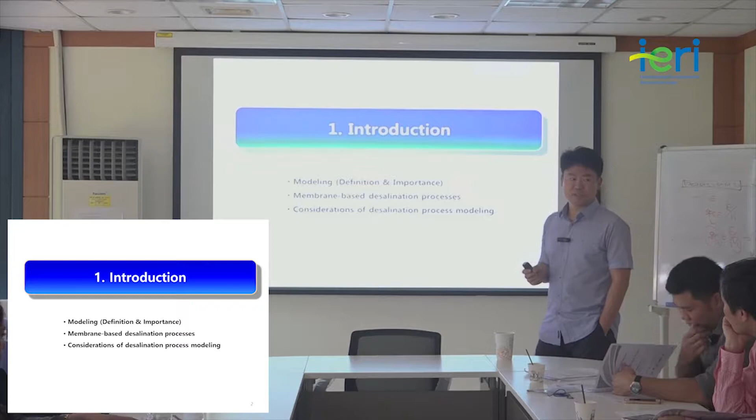I'm going to introduce what modeling is, the definition of modeling in membrane-based processes, and also the consideration of the point of optimizing the processes.

What is model? An example, what is model? Simulation? Huh? Simulation, what is model? Procedure? Yeah, procedure, you guys are so academic. This is model, you know. So then what do you think? Beautiful, right? Handsome, right? And the others, what do you think? Same to you. Same to me. Thank you. You're a very good student. Okay, this is me, right?

So I'm going to give you a quick lecture on what modeling is. Everybody has a modeling scheme in your head. Within 0.3 seconds, you set up the model and compare it with your thinking. We call that the hermeneutic circle. You can find that in your dictionary - it's a very philosophical approach if you can't understand the language. We can say this is the theoretical word: model. This is the target system, which is the real world. So I can say this is the model, this is you - the real world is you, this is the model. Can you understand that? Okay.

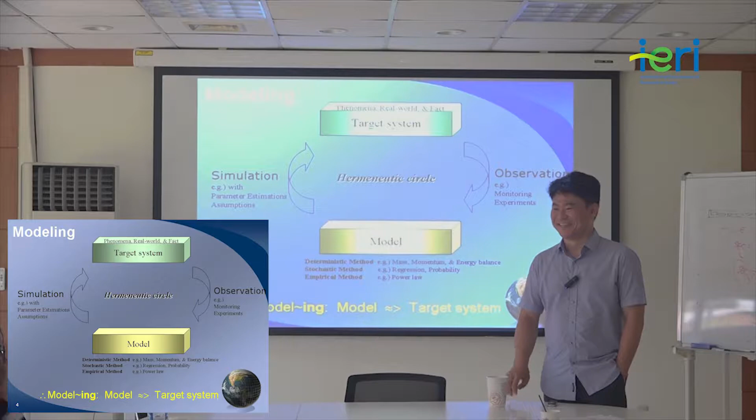Yeah, that's my books. This is the reason I'm here, to sell the books.

That's the statistics part, one of the models, belongs to this stochastic model, and that's my book. If you're interested, I can buy that for you. No, I may give you one—I don't know how many textbooks I have, but I can give you one with my signature. Maybe I have two now, I'll check it.

So modeling starts from this model and target system comparison. That's modeling, an ongoing process. So why do we call it sampling? You can see the back side of this textbook, the back cover. There is another language there, sampling, right? Why do we call it 'ing', that ongoing format?

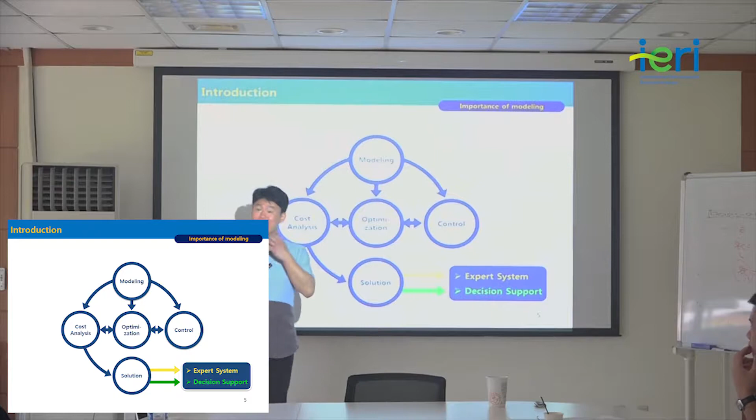Let's say we collect that temperature here. Where is this temperature location? Where? Tell me. Where should that temperature location be? Here? Here? Here? Yeah, that's the reason we need sampling.

We have to do random sampling to get an objective result, right? That is science. Statistics is a grammar of science, and modeling is a grammar of engineering. So statistics is grammar of science, modeling is grammar of engineering.

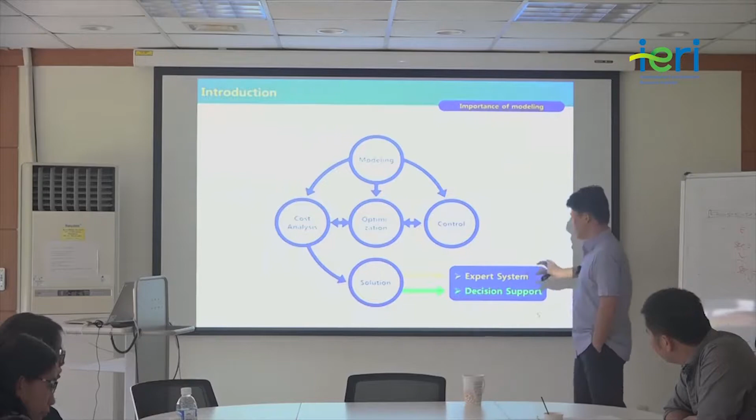So starting with this modeling, we can do control approach, how to do optimization, how to save money with cost analysis, and what is the solution for expert system or decision-making system. First one is modeling.

Today I can give you this example of CFD. Anybody know that? CFD—civil, chemical... CFD, computational fluid dynamics, CFD, computational fluid dynamics, and image and numerical analysis. I will give you the example, the process model, and how to control it.

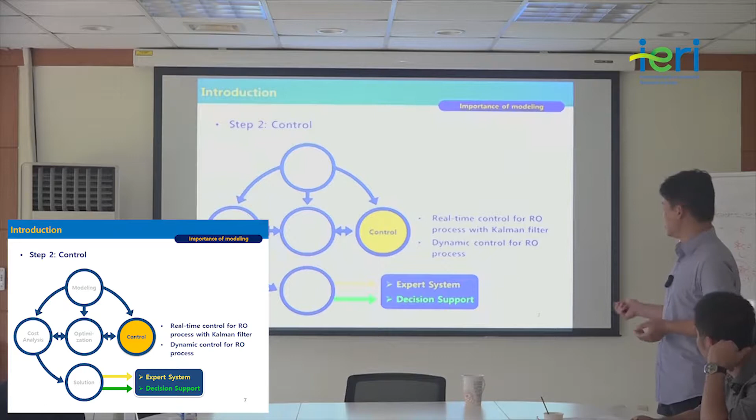So we will learn about control, real-time control with Kalman filter. Kalman filter is one of the engineering tools to remove unnecessary signals. Then dynamic control for reverse osmosis, cost analysis and optimization that might happen using artificial neural network, AI, artificial intelligence approach. And the last one, after controlling, modeling, optimization, we should say something as a decision maker.

So the decision maker needs this expert system and decision support system. So this is desalination system design and model development, pilot system, data collection, model integration with validation and verification style, and the expert system can support your decision making.

Reverse osmosis you have learned, right? You have seen this one—intake, pre-treatment, reverse osmosis main process, and post-treatment. Usually we have two passes: first pass removes almost 97% of the salt, and second pass removes 99.9% of salt. Then storage—we have to do remineralization for drinking water, and this whole process needs some acid, chlorine, anti-scalant, sodium bisulfite, and other chemical cleaning procedures for removing pollutants.

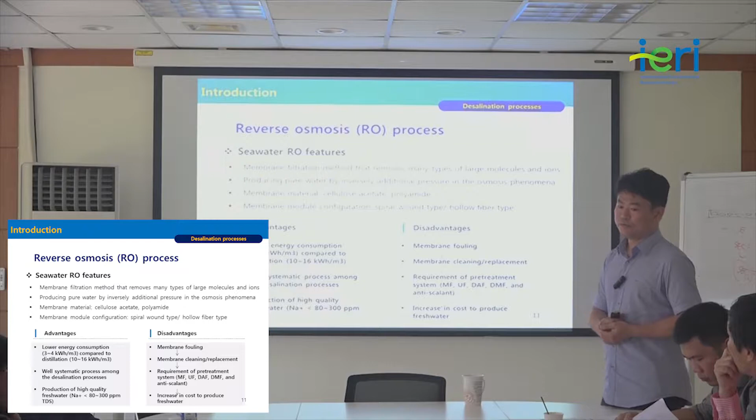That is a typical reverse osmosis system. We have advantages and disadvantages. Advantage is very low energy consumption compared to distillation, that boiling system—it takes almost 10 kilowatt hours per cubic meter, but reverse osmosis is 3 to 4 kilowatt hours per cubic meter of water. And the high quality of fresh water—one of the indexes is the sodium removal ratio under 100 ppm.

Disadvantage, as you know well, there's fouling. The membrane cleaning and replacement needs some cost. And the pre-treatment needs almost a similar system to drinking water systems—MF, UF, DMF, DAF, all membrane systems. And anti-scalant chemical we have to add to remove that scale, and eventually it increases cost.

So seawater reverse osmosis is a membrane filtration, and the types of membranes might be polyamide, PA membrane recently, and membrane module configuration is usually spiral wound type. Have you ever seen one? Yes, downstairs, right? But you did not understand.

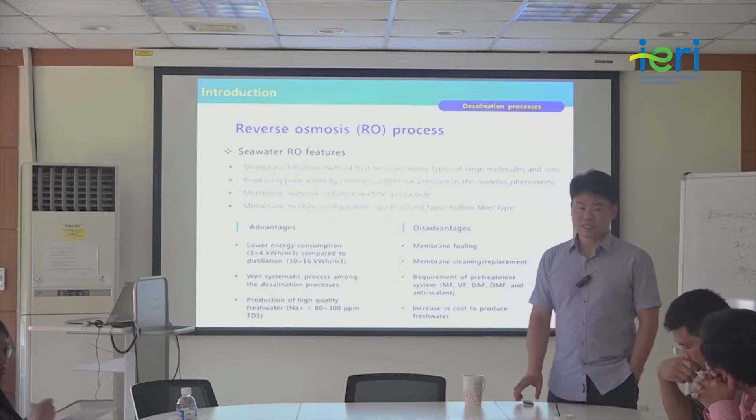Any other questions so far? So, I think I will show you that. See, this is the introduction. From now on, it contains a lot of equations. It starts.

So, reverse osmosis. Reverse osmosis needs high pressure pump, right? Yeah, to squeeze out the salt to make it drinking water. But forward osmosis has the opposite direction. It uses naturally driven pressure. We call that osmotic pressure. Osmotic pressure - do you know that?

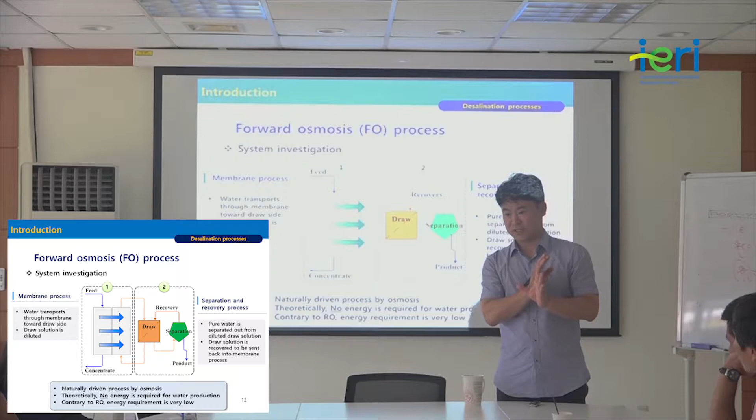This pack is separated by a membrane. This pack contains a high concentration of sugar, and this side is empty. So whenever you go to any river, any dirty water, you can put it into this side. Dirty water is okay, any polluted water is okay. Sometimes if you are in an emergency situation, you can use your urine here. You can use your urine here. Yeah.

Temperature is a little bit warm, right? A little bit, but it's drinkable. So this membrane starts to separate the water, only water, to the sugar side. Then you can drink the sugar water. That is a military army use for forward osmosis system.

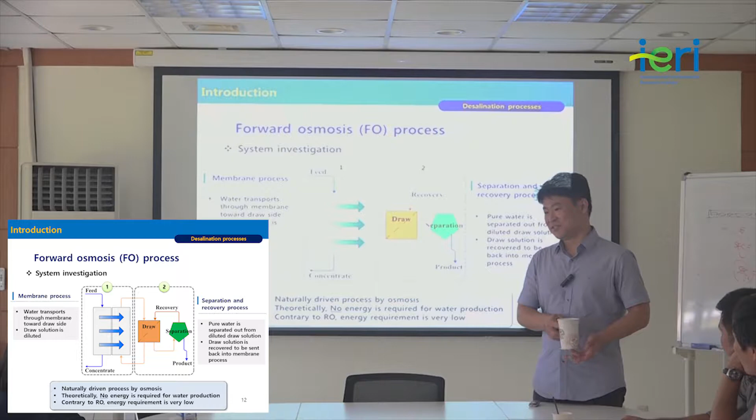There's no energy needed. If you are very urgent, you can press this envelope. So that's forward osmosis commercialized use. So I try to use my urine. The disadvantage is temperature - I like ice water, ice coffee, but urine temperature coffee is my body temperature, so I have to drink that a little bit warm water. That's sugar water, not urine.

100% rejected, but this draw is on the sugar side. The pure water is separated out of this diluted draw solution. Draw solution is recovered and sent back to the membrane process here, so we can utilize that. The draw solution is not only for salt, no - it's also used for other things. Usually we use that...

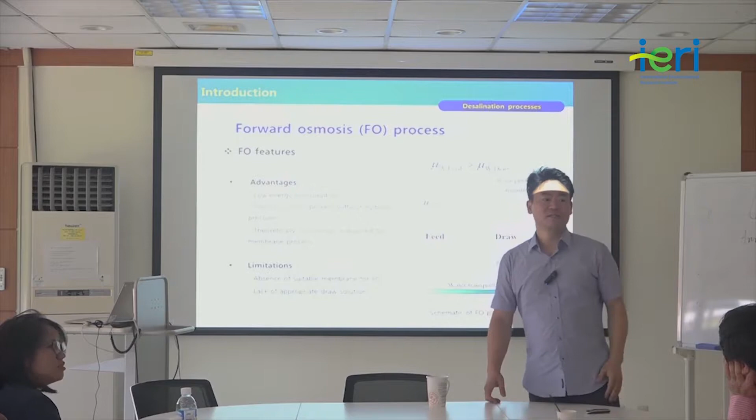Where did you get that coffee? That one? How many days do you have left? No, for this training - this is the last day. Wow, then I can tell you there's another coffee machine there. You can use it. Did you use it? No. Why not? Oh, I didn't. He is my TA, and he is my research professor for this lab. He's my TA - explain this structure to them.

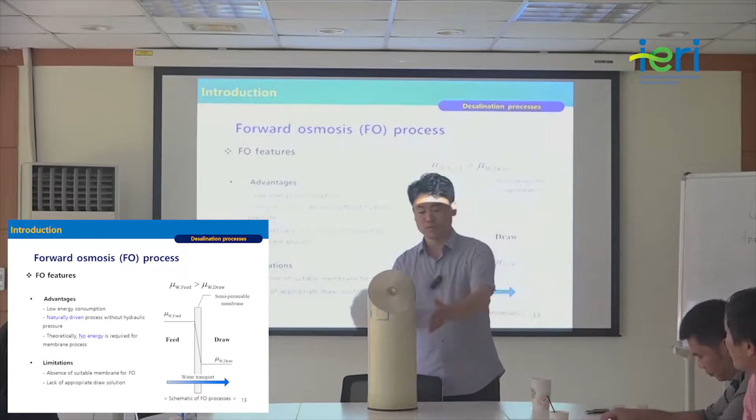You have learned, right? Do you know this? Yes? Come here, explain it. You said yes. Okay.

Reverse osmosis, water from here, right? Here, but you can see there's some layer here. Has somebody already explained this to you? This is seawater - let me show you the picture, but not really. Okay, seawater goes to here, and in between there is some layer, some chasm here that we can push the water through. Then that goes to that empty layer, accepting the water inside, and then why is this a roll? For bigger surface area.

Yeah, for bigger surface area, right? But how do you squeeze out the water? Pressure - with the pressure, yeah, high pressure. Then water rotates inside, like your toilet paper - push on this side, and then roll in, and there is some hole here, right? Hole here squeezes out all the water into here. And the hydrodynamic flow inside of this membrane rolls in here, or the surface rolls in here, water tries to follow this waterway, this road, and then eventually this hole collects the fresh water.

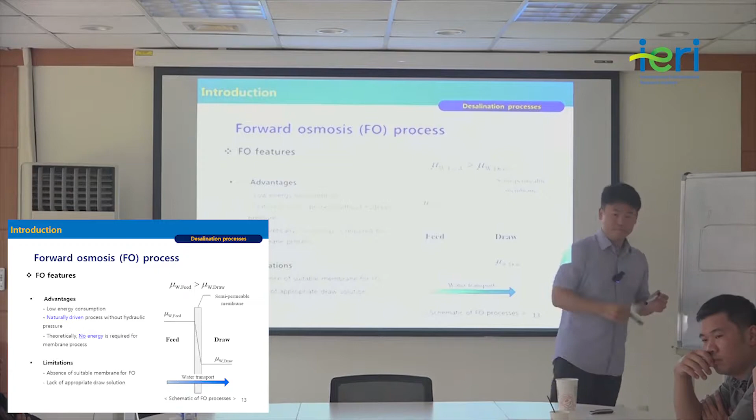This membrane has these two holes, two leaves. Starting with this format here, and then roll it - that's the way, roll it. Then it has a two-way direction, right? One leaf is here, the other leaf is here. You can see them, and we have two membranes here.

Here, that is the waterway, this space, inside this space. So if you unfold it, toss that one - if you unfold them, it looks like that. Unfold that, it looks like this. And where is the direction of seawater? Here.

Right? That's rolled, right? But if it had unfolded, it looks like this two-leaf system. There's a four-leaf also, it depends on the company - four-leaf. So two-leaf, four-leaf, and roll it. You can understand, right? Then this way, this is rolled.

This is seawater, and this is the membrane, right? And inside this space is a hole. This space is a waterway. So this seawater is squeezed under high pressure, and then by following this waterway and this hole, it accepts that fresh water, that hole. Can you understand that? Graphically, you have to understand that is the reverse osmosis membrane.

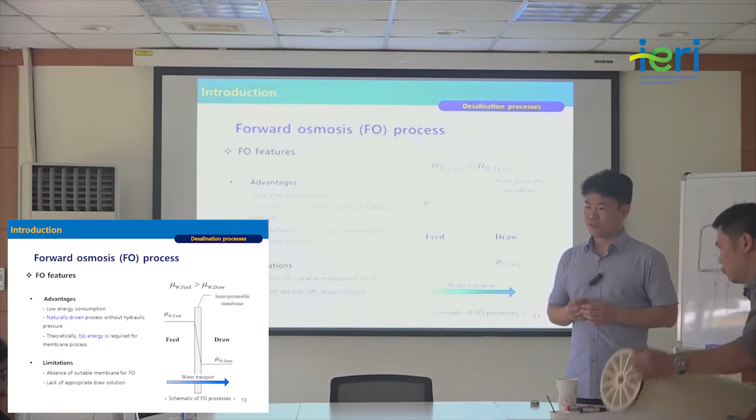Goes in - this is a drinking water system. But for forward osmosis, we don't need high pressure. We don't need high pressure. Yeah, you can put it on here.

And also, if you see, you can - did you see the spacer here? Spacer inside, did you see it? I see in the other one. Yeah, here, you can feel it - this is a spacer, here. That.

Why do we need a spacer? Why do we need a spacer? Space for the water, space for the water. Nope, here. So, top one - for filtration? This one, no. Otherwise it will stick. Why do we need a spacer?

Okay, I hope that you can enjoy this one. It's a simple design - all the ideas start from here. And how to roll it, that's the technique. It's a very simple design, right, that one - it's a very simple design.

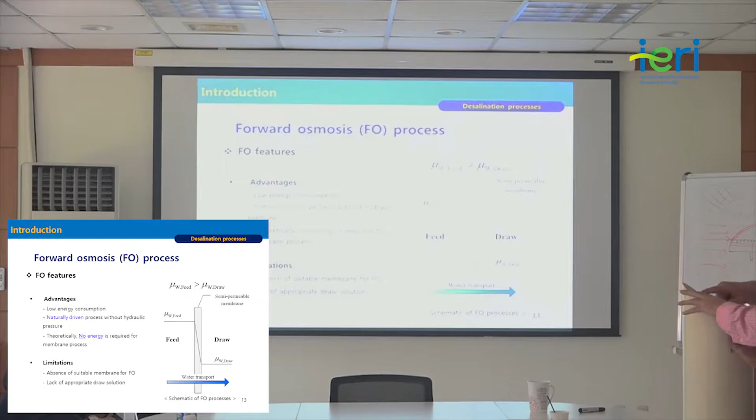So if you put that spacer here, you can feel it inside. Some spacers look like that - try to find it. No, be brave, it's okay, it's already broken, be brave. You can feel it, right? And this is a spacer here.

The reason is this spacer's role is - let's say water goes in that way, see here, water goes in that way. This is a spacer, right? This is a spacer. Water goes in that way, then see, this concentration polarization is broken. How do you do that? The spacer breaks it - meet this spacer, broken. Meet this spacer, broken. So this concentration polarization was broken down that way.

So this layer - originally if we don't have any spacer in between, this concentration polarization boundary layer thickness hinders water penetration. But if you have that spacer, it breaks this boundary layer, meets, breaks it again. That is the theoretical approach for how water can penetrate this thin layer. To roll this thin layer, we need that spacer - not only for reverse osmosis, but also for forward osmosis, pressure retarded osmosis, and membrane distillation, to make it a spiral wound type. You should consider this concentration polarization.

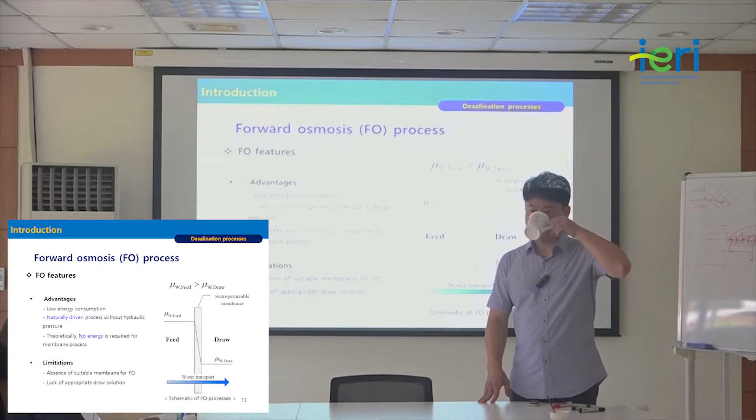So osmosis needs solvent and solute. And also, osmosis phenomena is based on potential theory - chemical potential.

So when you have a coffee with water, let's prepare to separate it. Let's do that. Why not? I'm sorry, I touched yours.

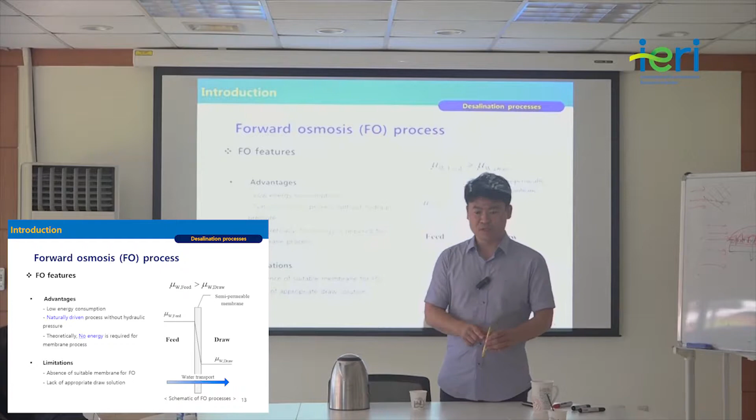So let's say this is water here, and water here. We call that chemical potential - water chemical potential, coffee chemical potential. Which one has high potential for water chemical potential? Water, because it's water chemical potential. Which one is high chemical potential for coffee? This one, coffee, right? But if we mix it, this is high concentration, right? This is low concentration, right? But which one is high water chemical potential? This is high water chemical potential, low water chemical potential, because we don't have water here, right?

That means energy should flow from high to low, right? High to low. Which water chemical potential is high? Water. This is low water chemical potential. So it moves. When can they stop? At equilibrium. We call it equilibrium of what? Equilibrium of water chemical potential, right? Then it stops. That is osmosis.

Water chemical potential draws to low water chemical potential, right? Coffee, water - then why? Let's say, can this be mixed in this state? No. When can they mix? If I push that, put it into here, right? But without my action, they cannot mix, cannot be mixed. That's the reason we call that...

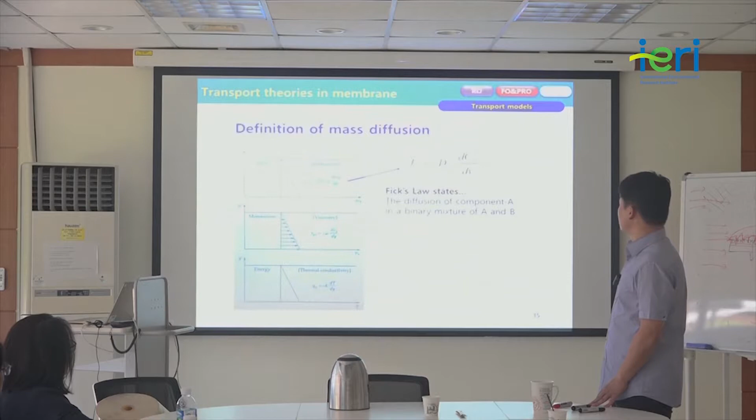Potential. Potential is not energy. This is like a kinetic potential, and position is high - locational high potential, right? We call that potential energy. If I drop it, then it becomes energy, which can transfer to the ground. Before it meets the ground, this is potential. Same idea - without mixing, they have potential.

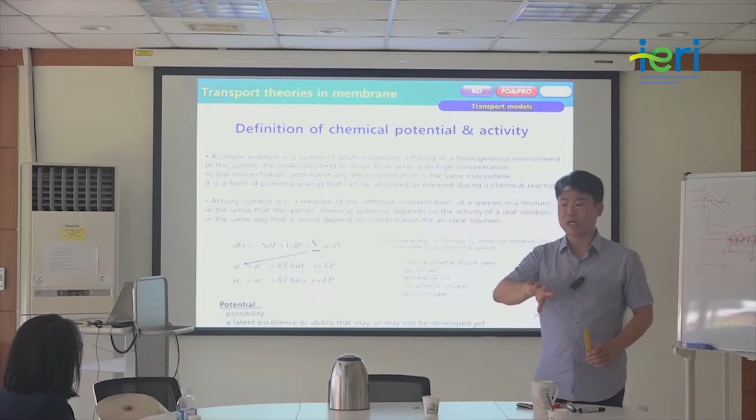Potential. But how can they mix? Then with my action, this can be mixed, right? Why can they be mixed? In this state, this potential switches to energy. We call that mixing energy. In this state, we call that mixing energy, but before mixing, we call that potential.

That's the reason we call this forward osmosis - mu is the chemical potential of water. Feed has higher chemical potential of water, draw has lower chemical potential of water, right? So high energy is supposed to move to low energy. Between them, we call that a semi-permeable membrane - semi-permeable means selectivity for water. Then this high chemical potential water energy is moved. That is natural energy.

Like this mixing - this mixing energy is also natural energy. So it's a naturally driven process without any hydraulic pressure. This is a gift for you. This rotational energy is additional mechanical energy, this is not potential - this is actual energy combining chemical potential and mechanical energy. So you have to pay me then. So this is no energy we need.

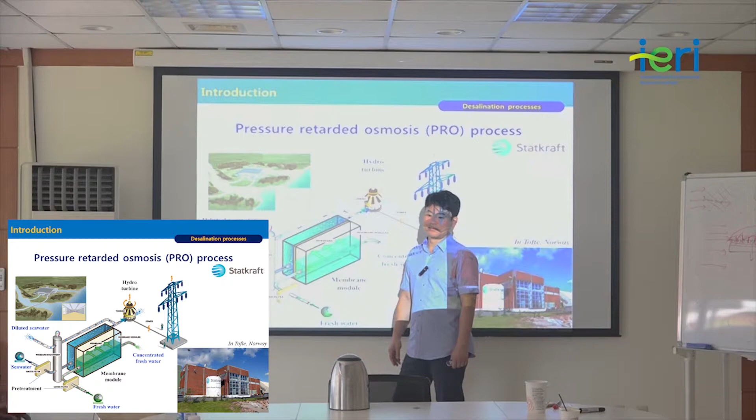Fresh water, you can say coffee - this is just water, fresh water is just fresh water. This is a salty water, you can say there's some coffee, concentrated. So water chemical potential is fresh water is high.

That's obvious. So river water, any area like an outlet between ocean side and river side, we call it confluence of river and ocean. Coastal area, many countries, most countries have this confluence. This confluence site, you can put this generating plant. This is just an imaginary view, but now it's working in Norway, Korea.

Vancouver, Canada, we try to construct this generation plant, PRO, pressure retarded osmosis plant. Fresh water goes there, here is a membrane, a big membrane. It looks like this, but this is a conceptual viewpoint. Water, this high water chemical potential, is supposed to move there, right? Seawater - this membrane makes that forward osmosis kinematics here.

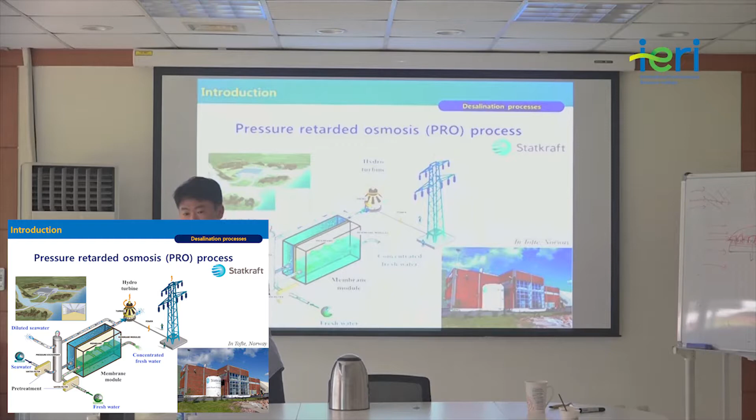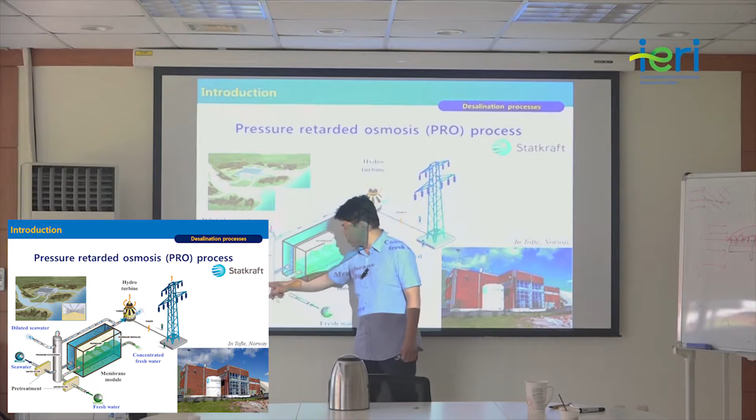Now it's commercialized, this pressure exchanger. The first purpose is to extract or induce the water, to import the water into this side. We need a pump here, right? Also to introduce this seawater into this container, we need a pump here, right? So this pump energy can be recovered by the pressure exchanger - some part of water goes there, then rotates the turbine blade.

Then the other water goes there, and inside here pressure is exchanged. So the pressure exchanger eventually means no energy is needed. We need the initial introducing pumping energy. And after one turn or ten turns of this system, the pressure exchanger starts to work, then we don't need another energy to run it.

This is pressure retarded osmosis, and my lab must be the top leading research group of pressure retarded osmosis in the world. So most of the research related to PRO is my students, and my group is the best research group in the world. And also I introduced this into Korea. Korean government started 5 years ago - we started an almost $30 million project to develop a small scale pressure retarded osmosis. Now it's working.

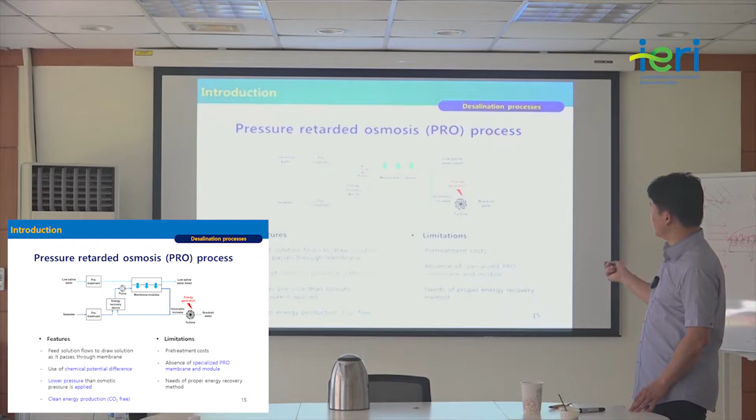This is pressure retarded osmosis - see here, low saline water, seawater, energy recovery device. So this needs some pumping energy, initially input this energy into the membrane. This is pumping energy here, because we need seawater. Introduce this high saline water, and the membrane drives this naturally - this is the forward osmosis process, and then this goes to volumetric increase. This volume increase rotates this turbine, and then produces brackish water.

It has 3 advantages, so that's the reason I put my effort into this PRO research. First one is, if you use reverse osmosis, what is the problem? Brine.

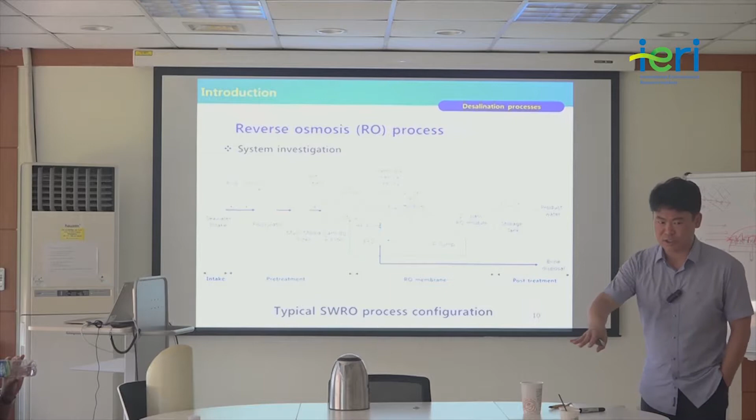Brine, concentrated. See, seawater can be made drinkable, but the other part becomes concentrated. That is another wastewater, because it's double the salt concentration - because we removed it for drinking water, then the other part might be concentrated, right? That is wastewater, that should be treated - there is another treatment we need. Also, we discharge that into the sea - another pollution, right? For the reverse osmosis disadvantage, we need this separation technique.

For pressure retarded osmosis, first, seawater can be used, and river water can be used. River and seawater generate energy when they meet together as brackish water. Seawater can be reduced down using this, and we will learn with the reverse osmosis system. So this low saline, brackish water has no environmental impact.

But reverse osmosis has an environmental impact: brine, concentrated water. So that has 3 big advantages, which we will touch on after combining all the processes. Clean energy, CO2 free. That means we can suggest this for the Paris climate agreement. This is free energy, new renewable energy.

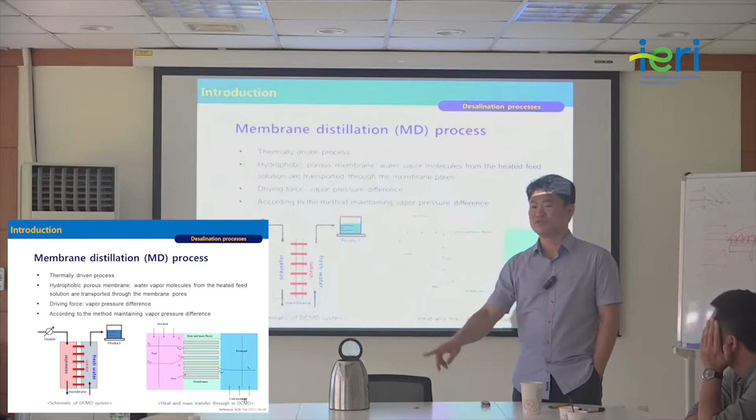You need a condition: 1 bar, 25 Celsius room temperature. Then water is supposed to boil at 100 Celsius, right? Without that condition, water sometimes can boil around 90 Celsius. Sometimes it can boil around 100.5 Celsius. Who said 100? It's funny science, right?

So you have to learn exactly the same thing here. Membrane distillation uses that scientific phenomenon - vapor pressure can be generated anytime. When delta T is greater than 30, or 25, it's okay, depending on the condition - 25 or 30, sometimes 20 - then water vapor is generated. So just think, when you're boiling ramen or any kind of soup, you imagine that 100 Celsius makes the water vapor, right? No, it's not. Water vapor can be generated anytime delta T is greater than 30 or 25.

Temperature difference, temperature difference. So with this hot feed, cold feed, if we have a temperature difference around 25 or 30, then water vapor is moving through this pore, this hole. That's the mechanism of membrane distillation. So membrane distillation needs a hot feed and cold feed, and the water is moving.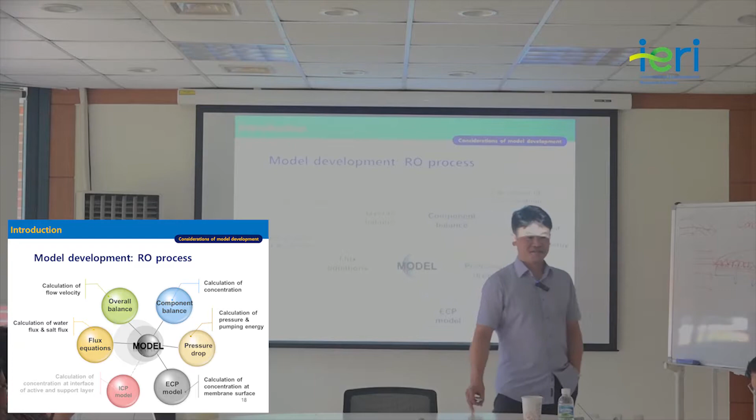How's your lunch? Yeah, good, nice food. But every day you're a liar. It's just student union lunch, right? That's just for the students. Oh yeah, you're a student. Then it's delicious, right?

So actually, to check up all the processes in reverse osmosis, forward osmosis, and membrane distillation, we have to check up overall balance, mass balance, energy balance, momentum balance, component balance, and also pressure drop, flux equation, and ICP. Have you ever heard of ICP?

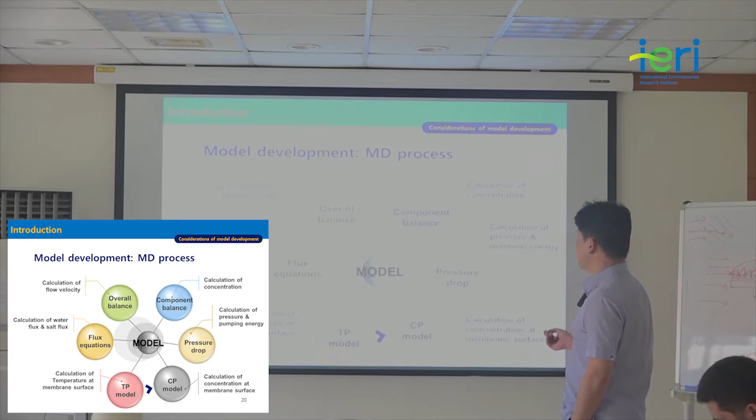Internal concentration polarization. ECP is external concentration polarization. But I don't want you to remember this, it's tough. I'll explain a little bit about that. These are the modeling steps for all phenomena inside of a membrane. This is a general description of membrane and transport model.

When we have this membrane, active membrane here, let's say this is feed in, feed out. When we have this concentration in the bulk side, this bulk concentration can be same as inside of membrane. Question: this bulk concentration, theoretically, should be same as this one, right? But there's some divide here. Why is that?

Obviously this is disconnected, right? When you see Dr. Amir's animation, he generates molecular dynamics with continuity of these two. There's no barrier there, so he considers everything as a continuous system. You saw that at the molecular level. But for most membranes, you cannot detect inside the membrane. You can detect here, right? Put a sensor in the bulk side here, and put a sensor in the bulk side here. The feed side and permeate side, we can monitor the CF and CP.

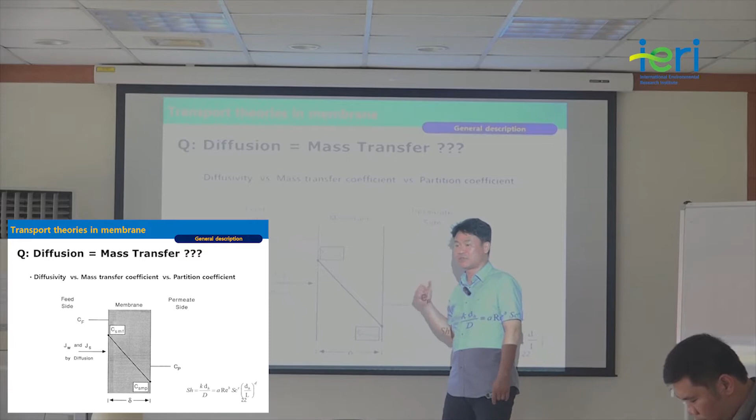Simply, I can say that this is diffusion, and this minus this is mass transfer. Bulk side monitoring results in mass transfer, but inside the membrane, the transport phenomenon is diffusion. For example, we have Fick's law: JA is mass flux, equal to DAB, dC/dy. This is Fick's law - high concentration is supposed to move to low concentration, right? That is Fick's law here.

But sometimes this flux can be calculated as A times delta C, something like that - CF, CP, right? Something like delta C, feed minus permeate concentration, something like that. Here's A or B, right? But are they the same?

What is this? Concentration and permeate concentration - that's measurable, measurable, right? A is a sum coefficient, just a coefficient. Then what can we utilize? Monitoring data - CF, CP, right? But this is not actually the same, this is a theoretically correct expression, depending on the distance and change of concentration. This is diffusion coefficient, diffusivity. We call this mass transfer coefficient.

In this case, we consider distance. In this case, we don't consider distance. But this is a measurable quantity - no, inside here, diffusion is a theory. Diffusivity is this one, DAB. Mass transfer is a measurable quantity. This is disconnectivity, diffusion is continuity - totally different situation. Diffusion has continuity, but mass transfer has disconnectivity here. So that's the reason we can utilize CF, CP.

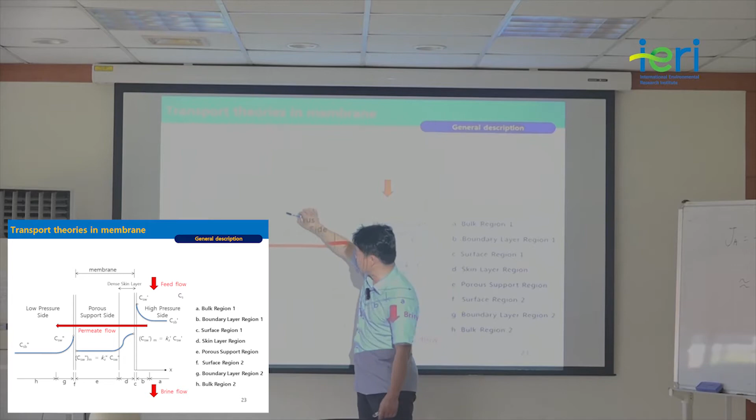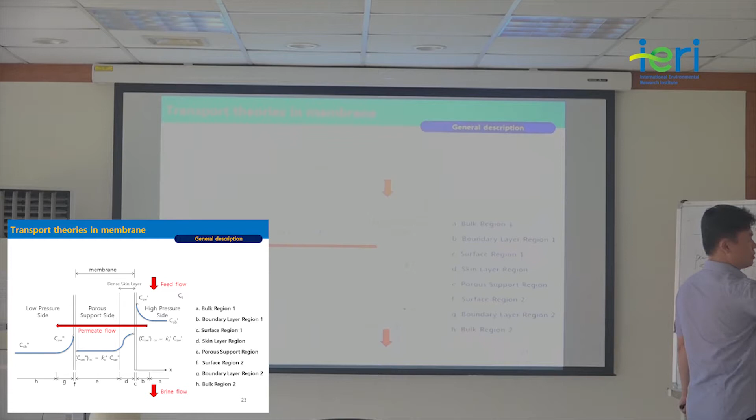Symmetric membrane - but what happened here? Skin layer here, skin layer here, then symmetric. Like this, skin layer here, then if you go there and drop, and a little bit drop, something like that. If you go here in this way, but drop, drop, something like that - we call that asymmetric membrane. This is the flow direction depends on this skin layer, support layer. This is a symmetric membrane.

Membrane is here, skin layer. But if you change it, that flow direction from here to there, a totally different phenomena happens, right? Active layer actually is supposed to reduce 99% of salt, right? But porous media, after that, just flow channel, this is. But once you change the direction, cannot be the same as this one. So active layer makes the membrane asymmetric. This asymmetricity makes this different phenomena of the fluid.

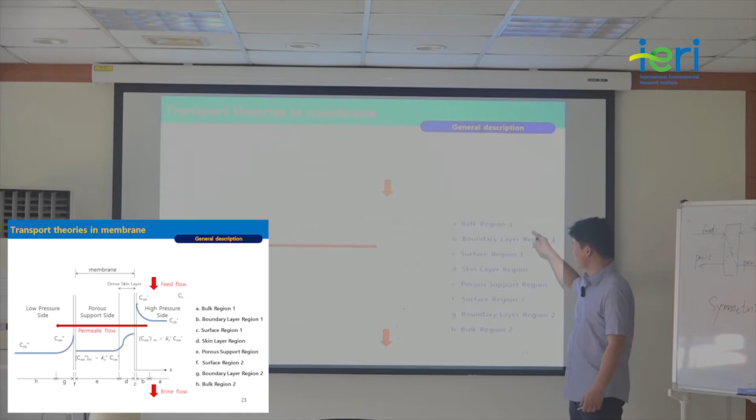We call that A is bulk region, H is bulk region also. See there, H, A here is a bulk region - that means there's no effect on membrane, just flow area, bulk. Boundary layer region 1, B, boundary layer region 2, G - they are similar here. Surface region 1, skin layer region, porous support region, surface region 2. So let me move on to there. Bulk region here, no concentration gradient. What's the gradient? The difference.

You know, art and science are similar. It's artistic language, right? It's art language. This is gradation, right? Dark to lights, right? Dark to lights, dark to lights, right?

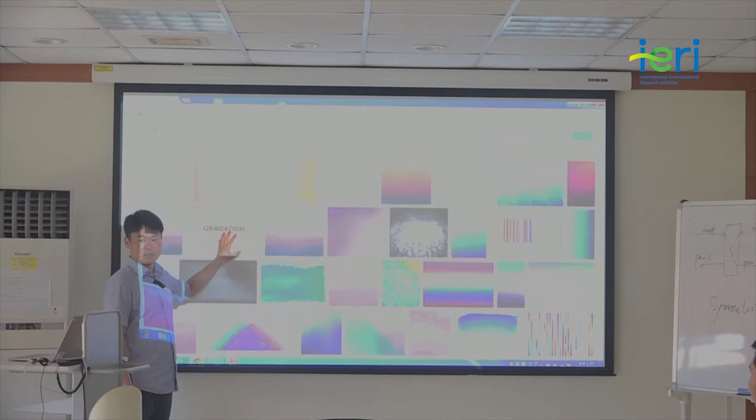Gradation - what's the gradient then? Gradation, you know gradation, right? It's art language, changing that color from dark to lights - that's gradation. What's diffusion? What's gradient?

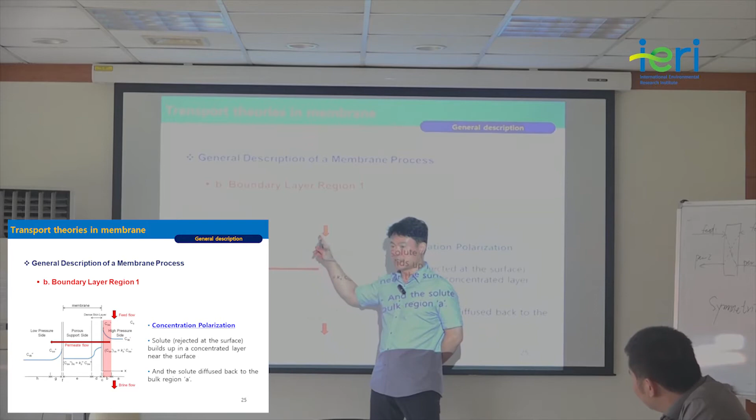Second one, concentration change, right? Concentration is changing, then there is a gradient, right? Here there's no gradient, right? Here there's a gradient here. So when seawater is squeezed to this membrane with high pressure, in common sense, concentration is increasing. It's common sense, so this increased concentration is supposed to move through there.

So within this region, concentration is squeezed, and polarization, we call that concentration polarization. Polarization means a squeezed polarization, concentration polarization. And then here, this region, membrane, this region, diffusion happens. Something like that.

What is this? Okay, good student, gradient, gradient. This is gradient, change of concentration with respect to change of distance. Gradient. Here, diffusion coefficient, diffusivity, we call it diffusivity. So within here, diffusion starts.

And then here, salt is rejected based on this here and there. This is rejecting concentration of this. Skin layer is the active layer here. And then support layer, most of that.

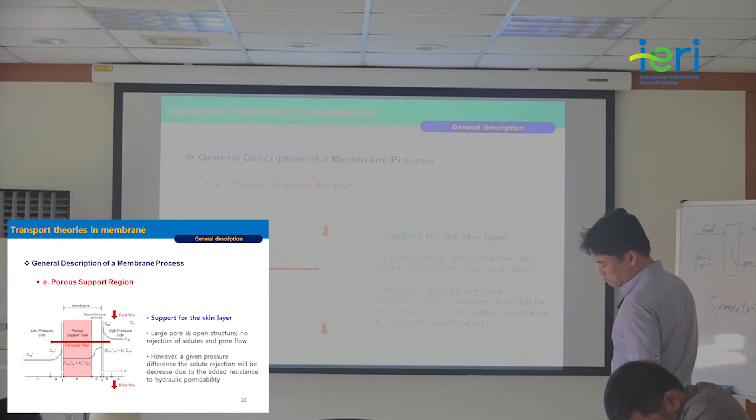Let's say I gave you this coffee, right? Where's my money then? When we start this coffee with water, this is pure water, this is coffee. When you start, just put this on and wait here, just wait here, diffusion happens, right?

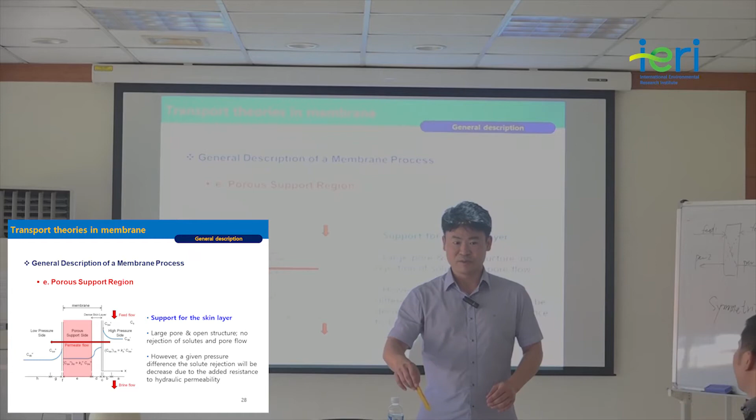But if I stir this using this, then mixing, we call it convection. Convection happens. Is it that winds, fan, convection or diffusion? It's convection, just a forced convection. Forced.

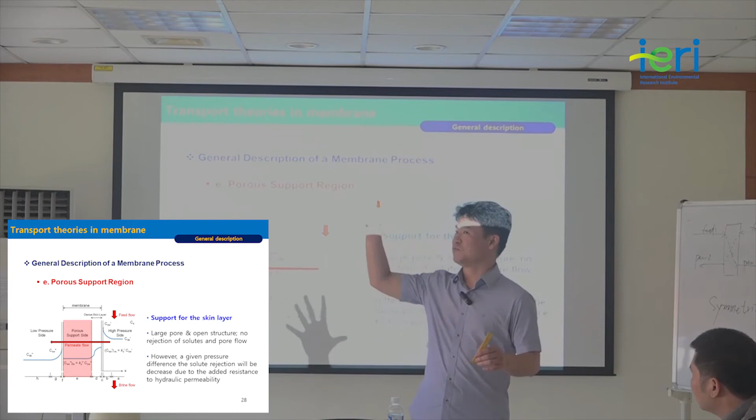Artificial convection, that one. Without that winds, fan winds, some temperature or air is moving, that is? No, that's natural convection. That's natural convection. That one is forced convection. Different. Whatever that is, something is moving here, that is convection with velocity. With velocity, then velocity related to, do we have a velocity here? There's no velocity, right? There's no velocity.

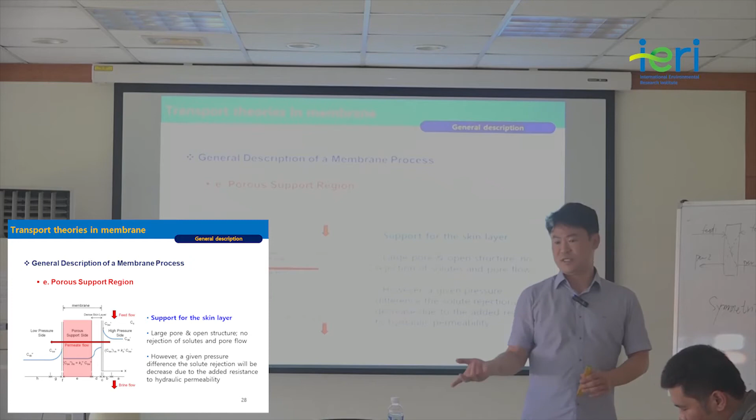Only concentration change with respect to distance, only that one. When some phenomena happens in distance and gradient, then diffusion. But when something moves with velocity, we call it convection. So we have natural convection and forced convection here.

Okay, then support layer, most of the convection happens, not diffusion. That's the reason here, very flat. Very flat here. After that, there's another discontinuity here. This is a skin layer, this is a support layer discontinuity here.

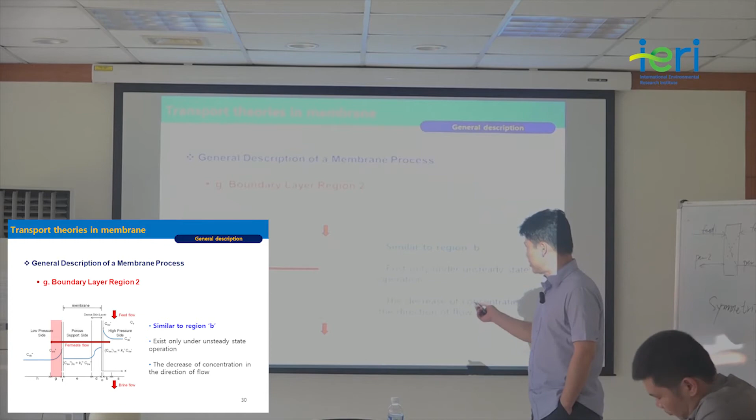Then concentration is supposed to be a little bit high. Then this is another desorption part of this membrane. And this is similar to B here, a little bit here. Not, even though not squeezed close to the membrane, there's some concentration increase. Close the surface, some concentration increased. Similar to no concentration gradient. This is the membrane phenomena.

You can graduate today. Yeah, that's it, that's it.

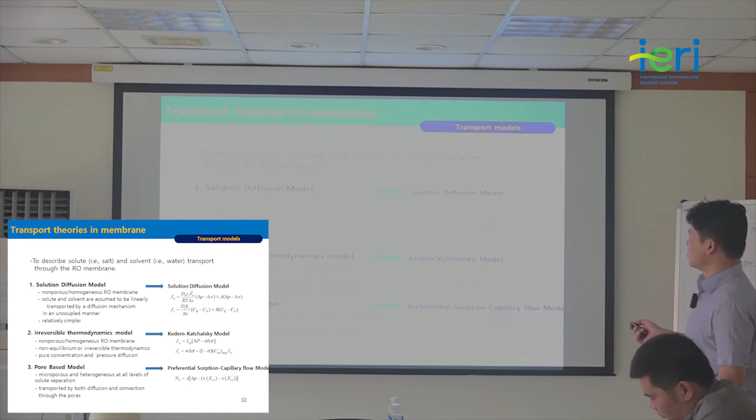Simple, right? But there's a lot of models: solution diffusion model, irreversible thermodynamic model, pore-based model, and here diffusion-based model, pore-based model, Kedem-Katchalsky, Spiegler-Kedem, surface force flow. You want to learn? Then you have to enter this school first.

Okay, but you can study. If you have a question, then send me an email, or send your staff or student to me, or you can visit me. Okay, as you know well, this school is very famous in water. Number 1 in Korea, and number 7 in the world. Number 3 in Asia.

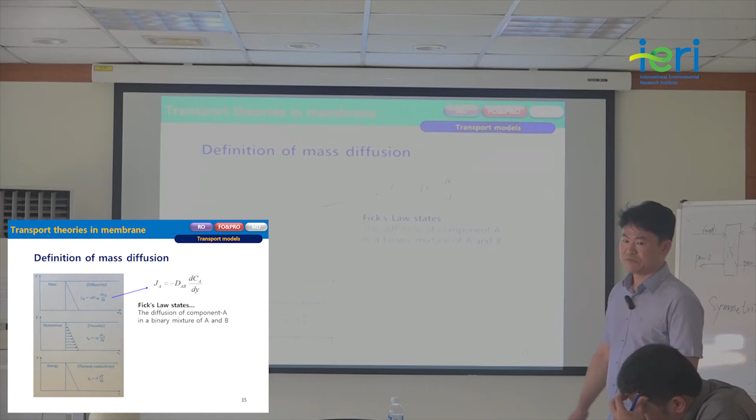So this is Fick's law, states the diffusion of component A. This is viscosity, this is Newton's law. This is thermal conductivity, Fourier's law. So these three - mass, momentum, energy transfers - are the same phenomena, we call transport phenomena. I will skip that. If somebody asks you, then give this note to them. Study it, there's the answer.

What I can say here, this is the procedure why concentration switched. Actually this is a concentration play, right? High concentration, low concentration, but it abruptly switched to pressure here. This is a flux, water flux. Applied pressure, osmotic pressure, this minus this. Why? We were talking about concentration, but it switched to the applied pressure and osmotic pressure.

This is the procedure how to switch, using thermodynamics, Henry's law, chemical potential, mass balance, water flux. That's it. So these are the thermodynamic parameters.

Theoretically, should we measure? Or are these two parameters measured? Applied pressure I give, right? 60 bar. Osmotic pressure we can find. Seawater is around 30 bar, 25 to 30 bar. This is measurable. Flux, water flux, we measure. This can be compared with these two.

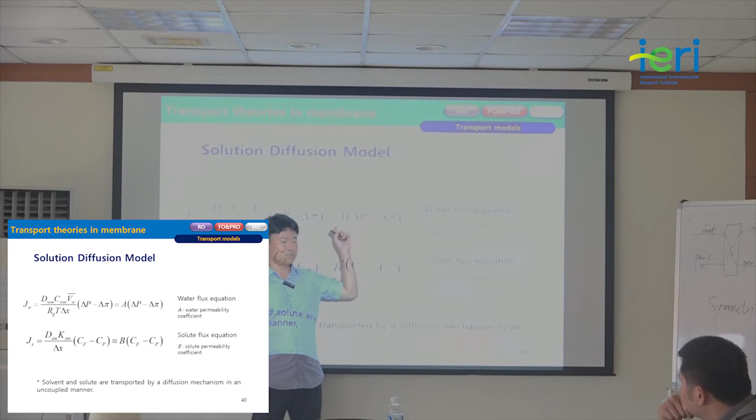A is just a fitting coefficient, right? We call this the water permeability coefficient. B is the solute permeability coefficient. So membrane companies only offer this A and B parameter.

They don't want to release the diffusion coefficient or the partition coefficient. They don't want to release that. They just release A. That's reasonable, right? You don't have to increase the uncertainty. Just make it simple, A. Make it simple, B. So they release A and B parameters for membrane performance.

There is some membrane number here. If we have more membrane numbers, find that company and click the membrane number, then you can see the A parameter and B parameter.

So A and B show that when A is high, what's the meaning of that? Water permeability is high, high flux. When B is small, then high rejection. Right? And A is high, then high flux. High rejection and high flux can happen together.

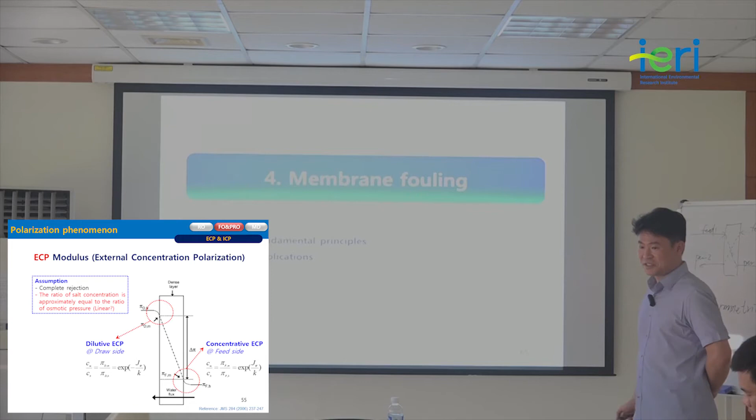Something like that, I will skip this. Polarization phenomena - I told you that diffusion used to meet this membrane, then around the membrane the concentration is going high. Skip it. If somebody wants to learn this, let them study it inside.

Fouling, membrane fouling is very important. What's fouling? You have learned, right? You have learned fouling, right? Professor Kim, how many lectures so far? Kim, three, this is the fourth. Did Kim do a fourth? I'm fourth, okay. Then most people talk about this, right? Fouling.

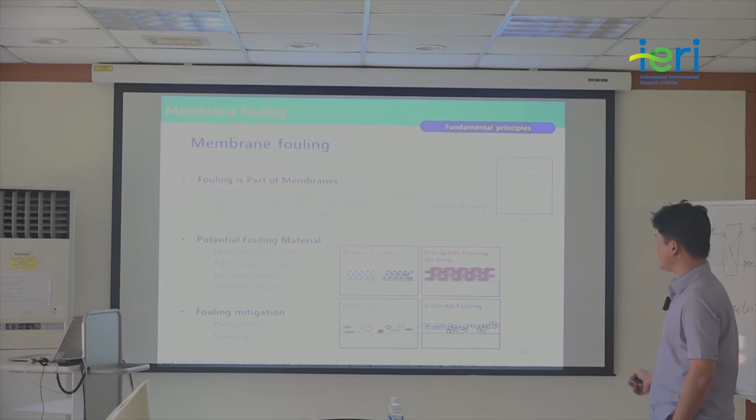This is organic fouling. The scaling related to salt, Ca2+, Na+, or something like that. Biofouling is bacteria or EPS. Colloidal fouling is colloids. We can segregate that - there's 4 different foulings: organic fouling, inorganic fouling, biofouling, colloidal fouling. It has responsible constituents: NOM, metal oxide, and other bacterial microorganisms.

Fouling mechanism is pore narrowing, pore plugging, pore gel formation we have. Cleaning method, we need some chemical cleaning, physical cleaning, something like that. But in the modeling, still we have a question about scale formation, cake formation, biofilm formation.

As a modeler, we developed this model. But do you think it's reasonable? Scale formation, can you define it? Cake formation, can you define it? Biofilm formation, can you define it? Attachment, growth, detachment - this is common sense.

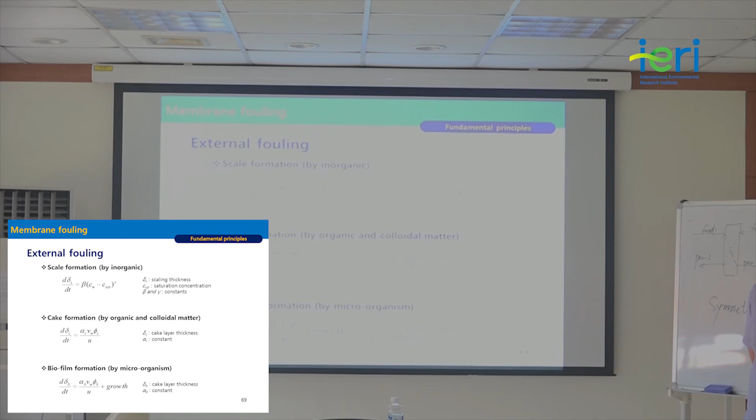Depends on how to define it, that's the modeler's work. So I developed that model. Who decided this model? Me. That means, can you trust me? You told me that it looked like a model. I'm a modeler, can you trust me? Yes, right, then we can utilize it. If you cannot trust me, don't use it. Just measure it, that's faster.

So for the scaling thickness, there is some power here, beta, gamma, and some cake layer thickness, delta, depends on some velocity. Biofilm formation, growth rate - we don't know the growth rate. How many microorganisms are in the water?

Thousands of thousands, something like that. We don't know how to calculate this growth rate of microorganism. If you believe me, use it.

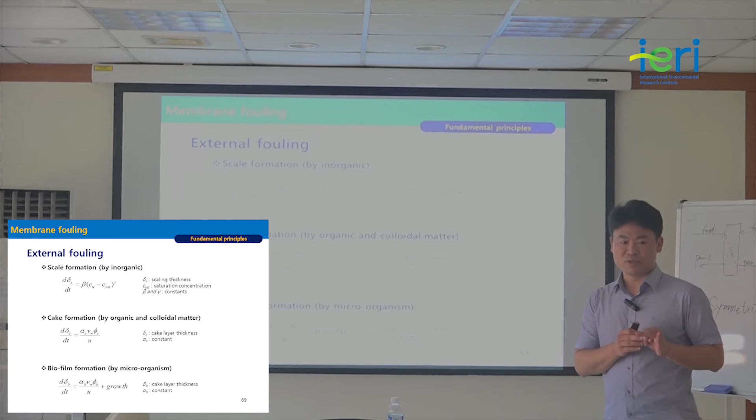But this is just a rough application because the fouling is still unsolvable. Fouling is related to, first, we don't know some pollutant inside the water. We don't know how many metal oxide inside the water. We don't know how many bacteria organism in the water. We don't know. That's the reason fouling is still an unsolvable approach.

But I can apply that there's some resistance like pore blocking resistance, cake resistance, concentration polarization resistance, membrane resistance. If I can make it, then total resistance from fouling can be added up, and then each one can be calculated in this way, but that is only followed by theory.

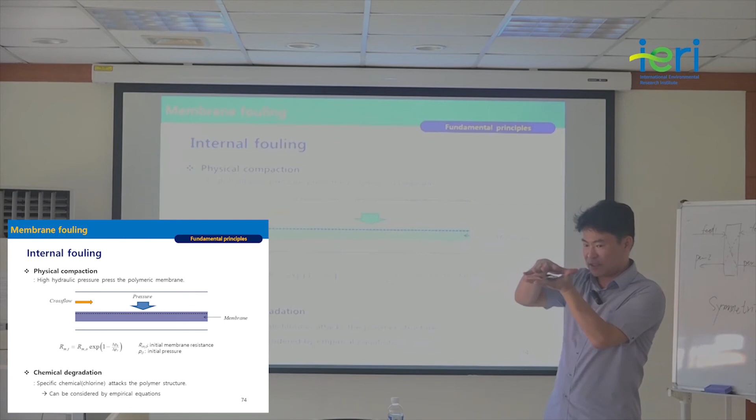So another internal fouling is physical compaction. If we have a high pressure cross flow, now you can understand, right? Cross flow, then high pressure cross flow make this membrane thinner. Compaction. This compaction makes some space inside the membrane compacted. Then water cannot flow well. The compaction of membrane and chemical degradation sometimes takes formation in reverse osmosis.

So I will skip it. Thank you, you can graduate. I will give you examples.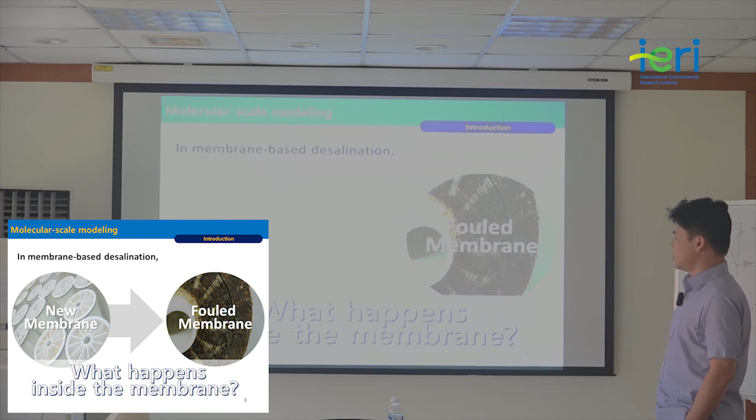Application, first one is molecular level. We don't know with new membrane how much foulant is inside, how to membrane happens, how to clean the membrane, we don't know. So we can consider scale simulation, this scale in simulation, 1 angstrom. You saw that, right? The molecular dynamics, we call that MDS, molecular dynamics simulation.

You saw this one, 1 nanometer, this reverse osmosis, micrometer. This different size can be modeled. First one is molecular scale, molecular dynamics.

We use the Schrödinger equation. If you want to learn Schrödinger equation, so I can toss that the chemistry, physical chemistry, and organic chemistry, and Einstein's relativity theory, and all together is the Schrödinger equation. If you want to learn, tell me. So it will take half a year to make understood.

Okay, Schrödinger equation was applied. Charge, van der Waals site, molecular level, dihedral angles, bonds. Okay, I will skip it. Quantum mechanism, Schrödinger equation, molecular mechanism, what Dr. Amir is was doing, molecular dynamics.

It's related to the computational technique and the movement of the atoms, and also evolution of system as a function of time, temperature, and pressure. Then it can be applicable.

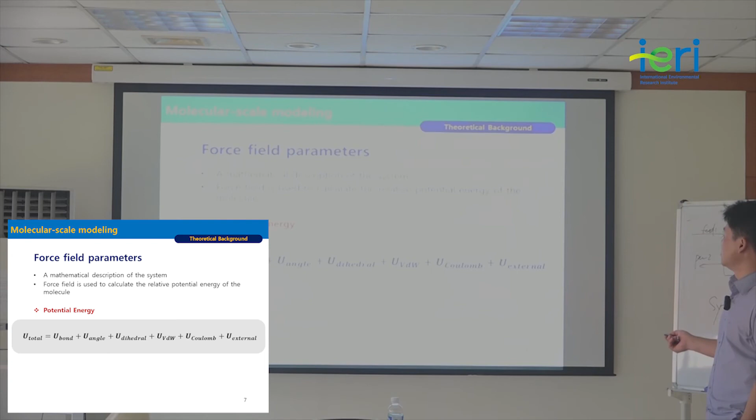So potential energy added up, they are bonding energy, angle. It has a chemical structure as an angle, right? Angle and dihedral. Dihedral means something like a dihedral. Van der Waals, Coulomb energy, external force. That all internal energy is added up. Sum of that: bonding energy, angle energy, dihedral energy.

Strong point and limitation: molecular dynamics deals with bigger systems and can simulate the dynamic process, diffusion phase transition. Limitations: the force fields are valid for limited types of material. So material information is critical. The material is important. There's no bond breaking, forming involved, and size of system is 10 to the 4 atoms.

Or few nanoseconds. You know, interestingly, Dr. Amir, I don't know if he mentioned this or not, to see 1 nanosecond phenomena, how long should the computer run? Give me the number. To see 1 nanosecond molecular dynamic phenomena, how long must the computer simulation run? 1 nanosecond to see 1 nanosecond.

You saw that movement, that is maybe 0.2 nanoseconds. To see that 0.2 nanoseconds, water is moving to inside the membrane like this, right? Water is penetrating into the membrane. First, to generate all that system, that phenomena happens in 0.2 nanoseconds. We have to run the computer 2 weeks to generate the shot, that's a 20 seconds animation. 20 seconds animation implies 0.2 nanoseconds.

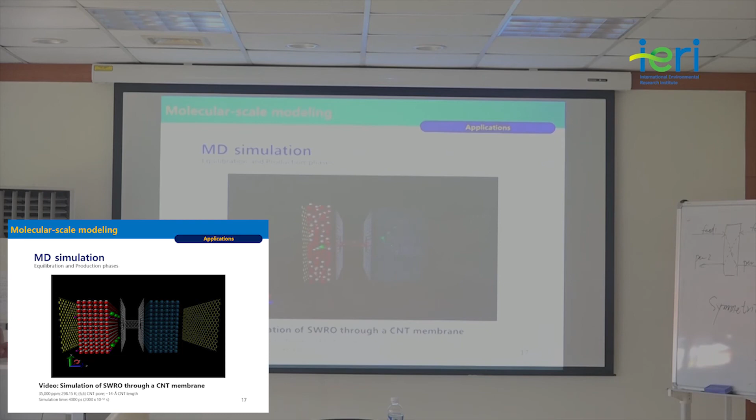This is a carbon nanotube, generated a couple years ago. This carbon nanotube starts to let water penetrate into the other side. He's also working on ammonium functionalized graphene, where a functionalized group can be linked to the graphene side, and also MOF, metal organic framework, where metal plus organic linker can be simulated this way.

I'll skip the micro size computational fluid dynamics part. You saw Seung-ji showed you the reverse osmosis system today, he's working on this. Computer technique plus fluid dynamics can be visualized this way. The same phenomena can be applied to the membrane side here.

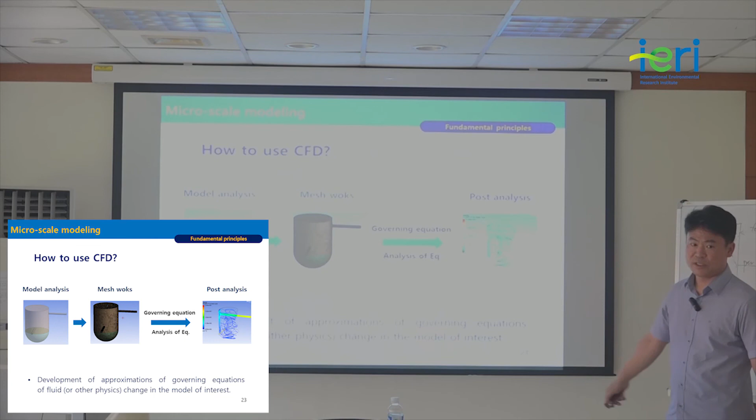This is a tank mesh design. The flow inside can be visualized. And this is a typhoon, also flow.

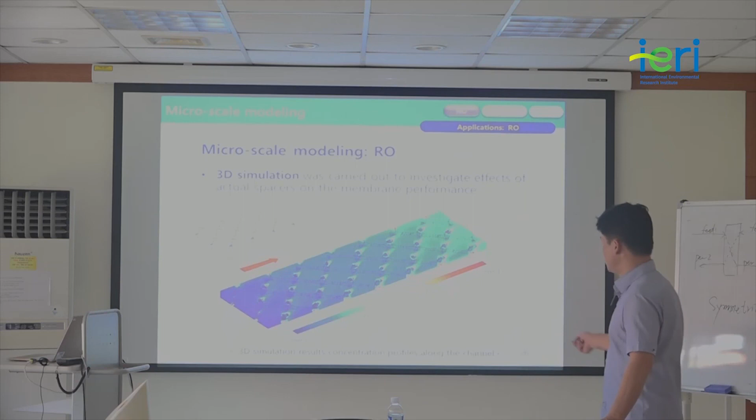Here, this is the spacer, the one you saw earlier. The spacer looks like this. What happens around the spacer? What's its role? It reduces concentration polarization. Then we can make water penetrate here because the concentration was reduced down around here. CP was reduced down, so the water can go that way, penetrating. And this is another reverse osmosis example.

If you change the current, instead of cross current, you get co-current or counter current. Counter current means flow in this direction. Co-current means flow the same way.

In forward osmosis, did you see the small forward osmosis system? We had one in the lab. The forward osmosis can also be tested and simulated using this soft module. Forward osmosis has this type of membrane, spiral wound. Initially it shows high performance, but as the distance goes longer, the performance is reduced.

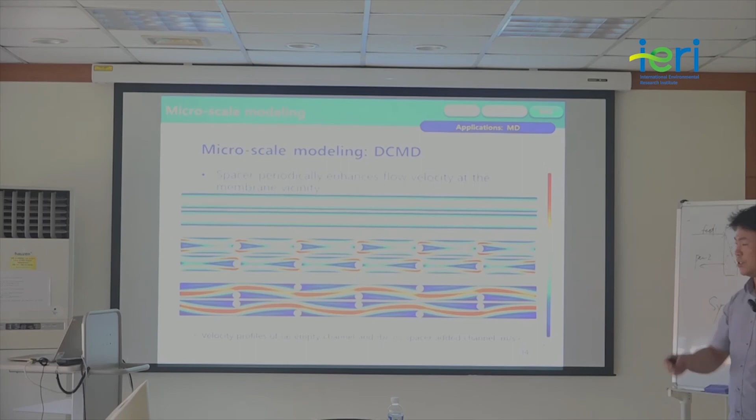Macro modeling is process modeling. You saw the small size reverse osmosis system, and it can be designed here with feed temperature and feed pressure. We can adjust the feed temperature, and we can adjust the feed pressure for the same membrane system you saw, right?

How do we change the feed temperature? You saw those tanks - there's a water bath. The water bath can be heated, and then we can adjust the feed temperature. Feed pressure means we have a pump - by pump application, we can adjust that.

These cross dots are the measured values. You can see that it's very interesting - membrane A, B, C have different recovery flux and rejection, they're all different. But interestingly, they offer only one value of A and B. Very interesting, right?

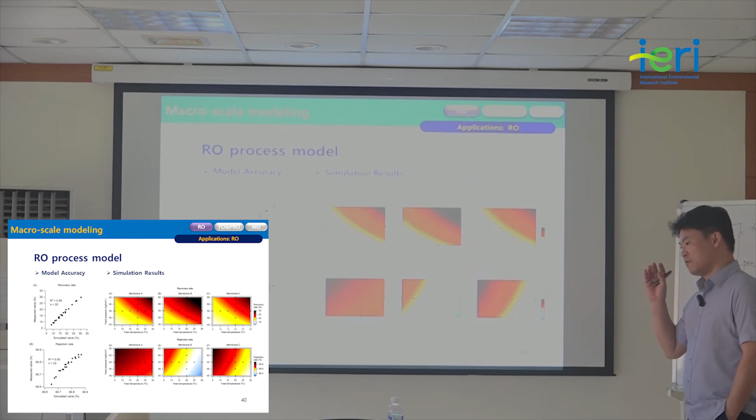Contract is more important. Contract - 5 years guarantee or 3 years guarantee, something like that. Contract is more important. This is our student's product.

Do you want me to explain it? This is overall balance, component balance. Do you want it?

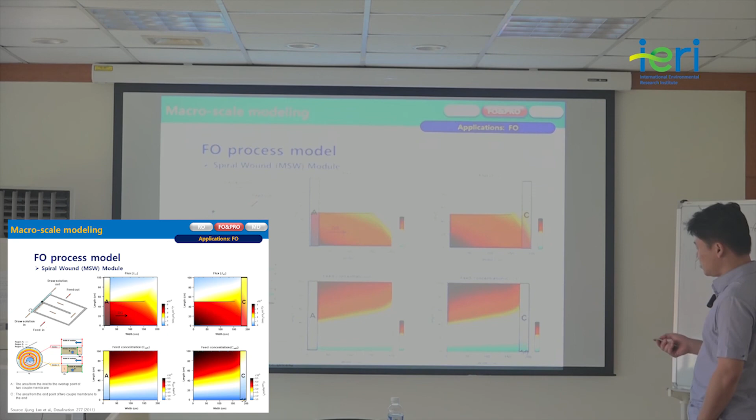I'll skip it. So we tried to design this module of forward osmosis. Forward osmosis co-current versus countercurrent makes a big difference in membrane positioning, and how much percent we can optimize that model. DS means draw solution, FS means feed solution. When we use this forward osmosis module like this, some special design has to be considered.

That's the point - PRO and DCMD have a model. The interesting point is the dynamic model.

I applied different feed concentrations, different temperatures, and we can adjust across 0 to 8 levels. Using a Kalman filter approach, you can see that the measured data and simulation data match with very high performance.

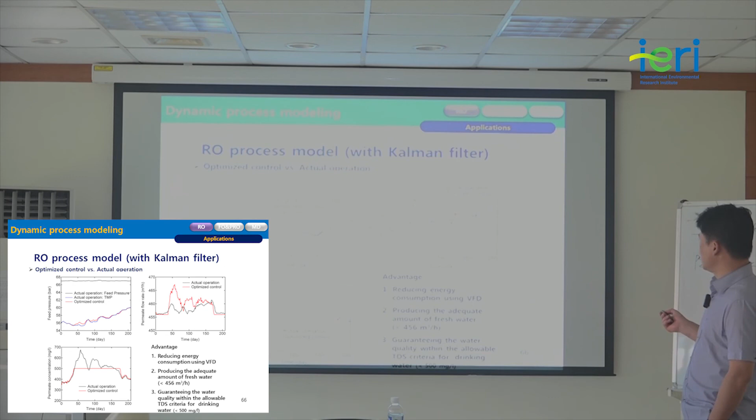This is measured data, but if we set a desired pressure here, a desired flow rate here, and a desired concentration here, then we can cut it. Eventually, optimized control makes more flow rate and optimized control makes lower concentration - that means high rejection and high flux might be possible. So that's the concentration - optimal control is important.

Numerical optimization, I'll skip it. It's not meaningful to you.

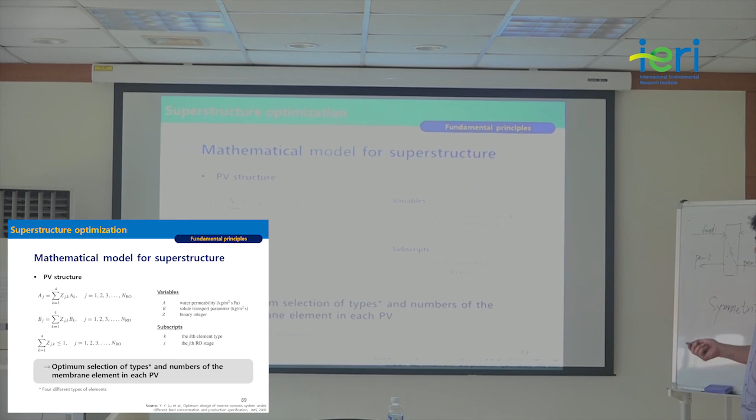Superstructure optimization means the reverse osmosis system has some pump station. The pump station needs a typical link to the energy recovery system. So pressure vessel structure can be optimized, and then there can be some control theory, and then how to arrange it - this is a total cost model. Considering all of the reverse osmosis system like this, it's a superstructure. Understanding superstructure optimization would take almost 1 year.